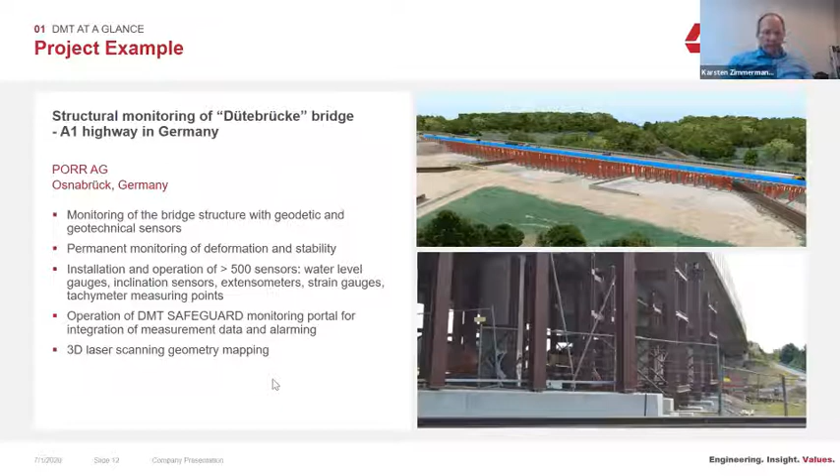We have installed over 500 sensors: water level gauges, inclination sensors, extension measurement devices, strain gauges, and so-called total station measurement points. These are installed by us. Each sensor is connected to the internet and sends data to our central database, which is included in our monitoring platform, DMT Safeguard, which handles basically all the client data.

This is illustrated here. You see on the right side different sensors which are connectable to our database. They send data to the database, and then the client sees a web front end with the latest monitoring data, and also has, for example, a map view to visualize the monitoring network, and gets, in case of an exceeded threshold value, an information alarm, a warning message directly on the construction site.

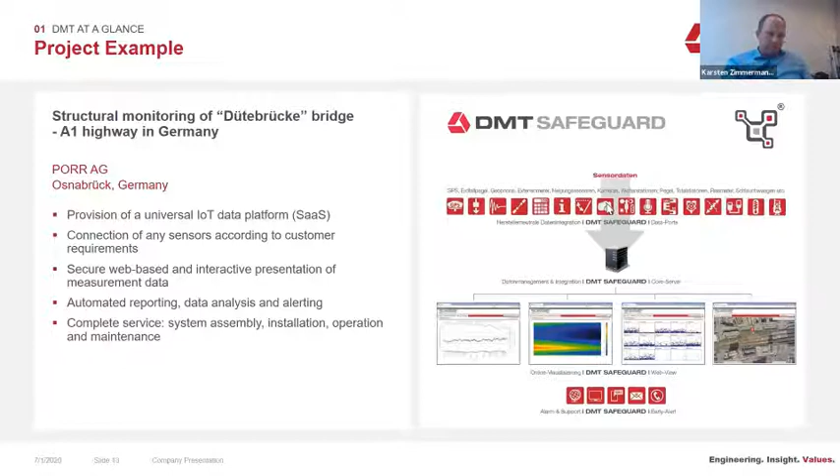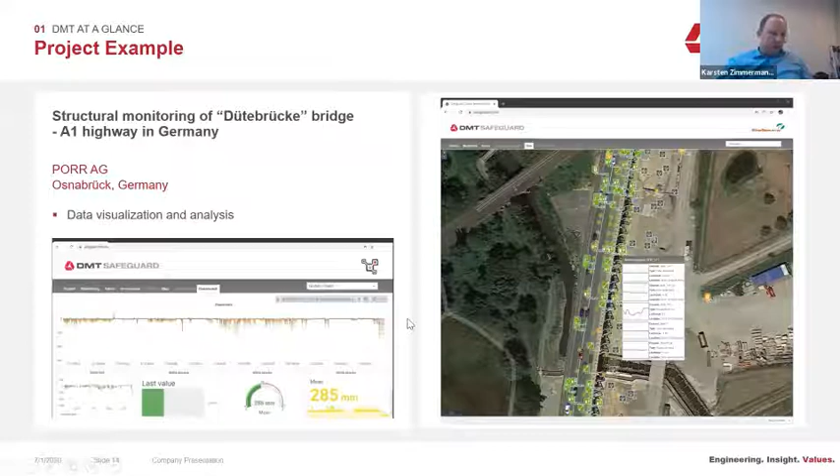Here it's shown: the client sees, for example, the bridge on the right, and sees all the small icons for the sensors, which are green in this case. This means everything is okay, no threshold value is exceeded. You can interactively zoom into this map to your object and check the sensor status online. There's a variety of visualization options, so you can plot charts, bar charts, and so on, just to get a real inside impression of your monitoring data.

So this brings us to the topic of tailings monitoring. Some introduction slides at the beginning: if we look on an international scale, we have over 18,000 tailing facilities worldwide, according to databases.

And there are different types of tailing facilities, as you know, like embankments, piled up paste deposits, for example dry deposits, or dams, which are basically integrated into the natural topography of the Earth's surface. These are really large structures, dams, several kilometers in length.

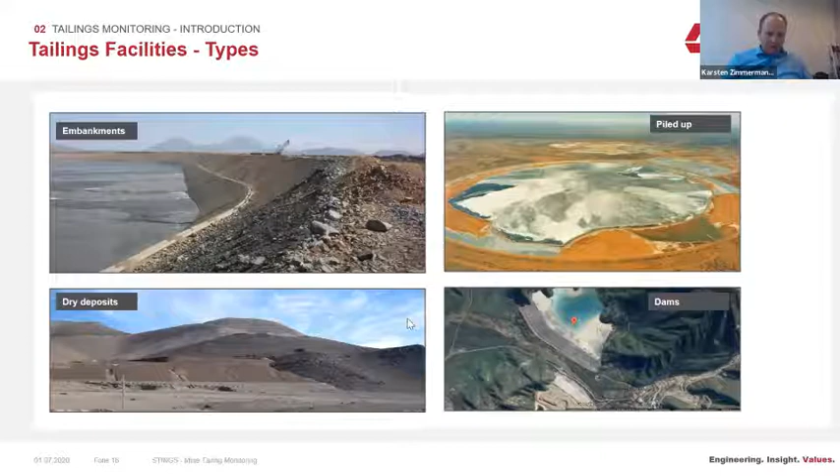In this case, in Chile, on the bottom right, it's a dam at 2 kilometers length and a height of about 100 meters. The geometry of the dam constantly changes because the structure is increasing due to increasing tailing.

Some details here about a specific country, Chile. Chile is important for us since we have a pilot test site for our STINGS services here. There we can count a high amount of tailings in general, over 700, and a lot of them, the largest part, are inactive or abandoned, and about 112 are currently active.

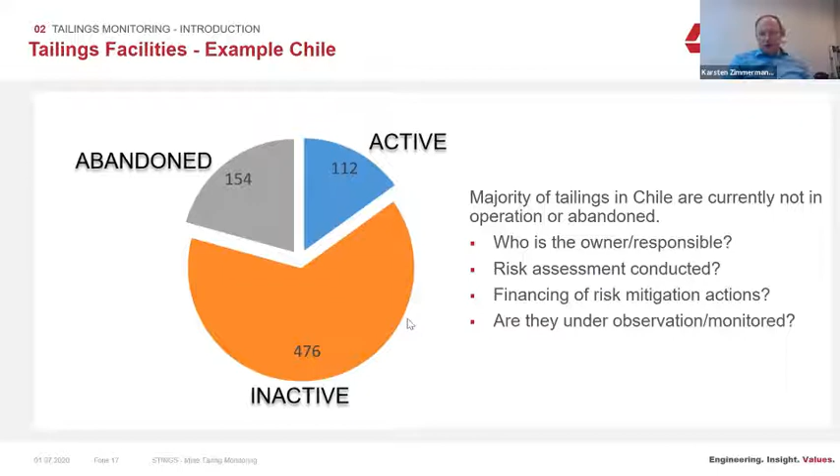Especially for the tailings not in operation or abandoned, there's always a question: who is the owner, who is responsible? Is risk assessment conducted? Who is taking care of financing risk mitigation actions? Are they under observation or monitoring at all? These are questions which arise.

Because, as you know, tailing operation involves risk, risk of failure. We had a lot of bad examples in the last years and decades. This is an example well known from Bento Rodrigues iron ore tailing in Brazil, where the whole tailing dam structure collapsed, inducing a massive impact on the environment and, unfortunately, fatalities as well.

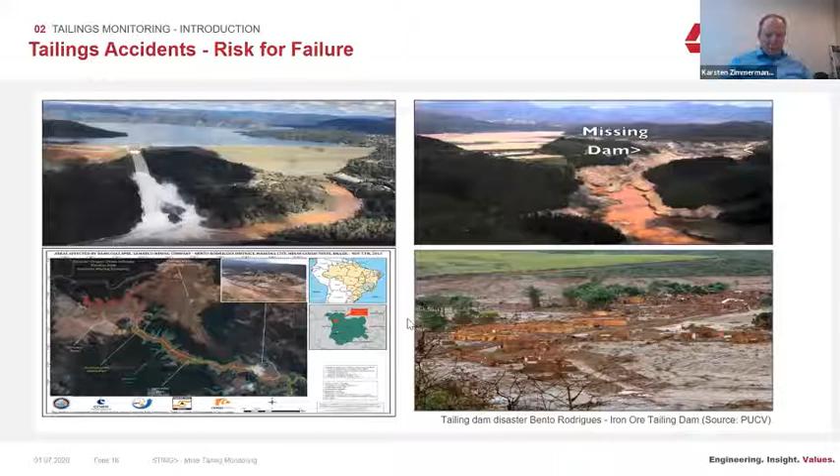If we look at statistics and some databases, we can see a significant amount of tailing failures over the last 100 years. You see here on the top right: North America, South America, Asia, EU, Africa. This statistic only shows reported cases. There is most probably a high number of unreported tailing failures which have to be taken into account.

Also, on the bottom right is shown the severity of tailing failures over the last decades. What can be seen is that the severity and impact increases over time, because the tailings increase in size and get nearer to populated areas and so on.

You can actually find calculations of the average cost of a tailing failure in the literature, which is about 455 million euros on average.

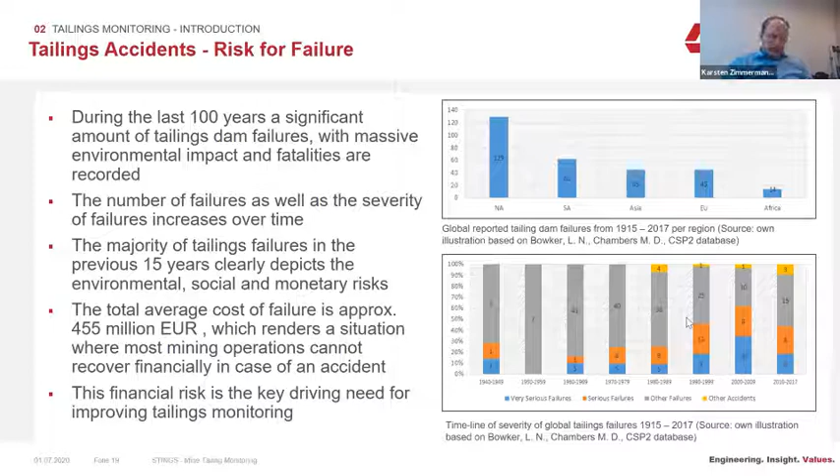On average, you can calculate an annual cost of about 275,000 euros per year, which a mining company would either have to save for the case of failure, or invest in mitigation measures to help improve and minimize accidents from the beginning.

And so here, the STINGS services, tailing monitoring, offers the technologies to do so.

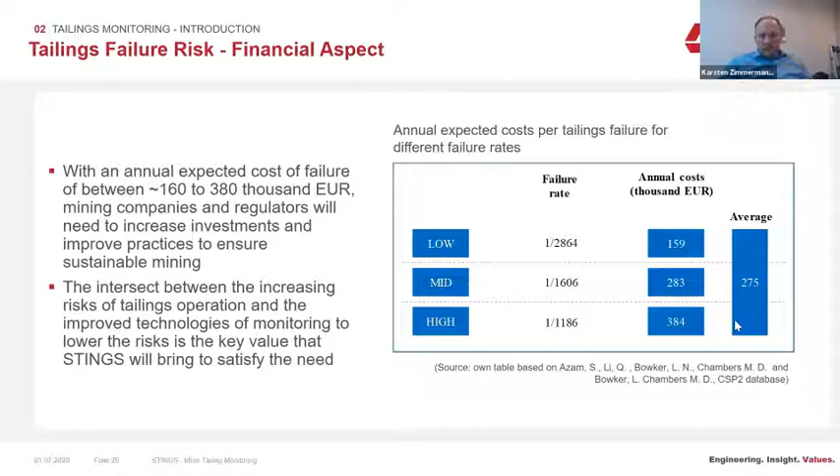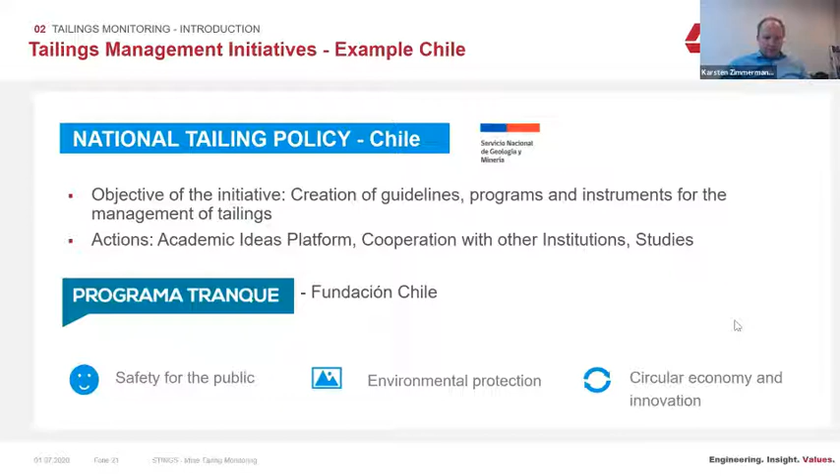The same can be seen in India - I was there a few months ago. In an initial step, they are also starting with a review of available tailings management guidelines, and compiling recommendations for improvement out of this - lessons learned, and then best practice guidelines to improve environmental safety and mitigate the risks.

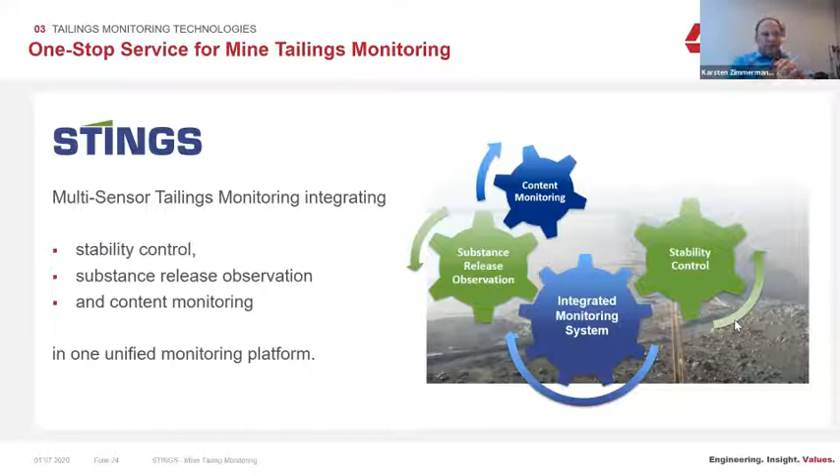And there's a partner network attached. DMT is the key partner, the project lead or service lead for the service, covering various topics like data integration and the data platform, which collects all the data, and also ground-based sensors, which I will explain in a minute. Then we have a company, EFTAS, which deals with remote sensing, radar remote sensing to detect ground deformation and leakages, for example.

We have universities attached, which deal with stability modeling, for example, and we have local pilot site partners. For example, the University of Valparaiso is responsible for the Chilean market, establishing pilot sites and test sites. We have a university in Romania dealing with a pilot site there, and the same for the Geological Survey of Slovenia, where we have a pilot site in Slovenia.

So the technologies we offer: geotechnical monitoring, which is basically providing a sensor network on site. We have radar remote sensing, which is processing and analysis of satellite data. We have optical remote sensing, which also uses satellite data, optical images. We have stability modeling, applying advanced modeling technologies to determine the stability of a tailing. We have geohydraulic modeling, where we have a special DMT-developed hydro toolbox allowing modeling of various aspects. And we have the data integration topic, collecting all available data in a unified platform.

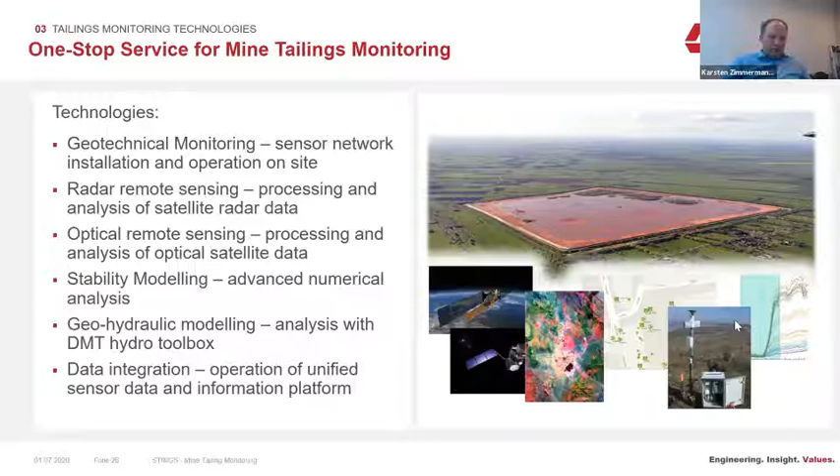So the platform solution is data acquisition at the tailing site, data transmission to a central database, in-depth information analysis, online visualization, and then early warning or alarming in case of exceeding a threshold or limit. And then we have also the reporting topic covered.

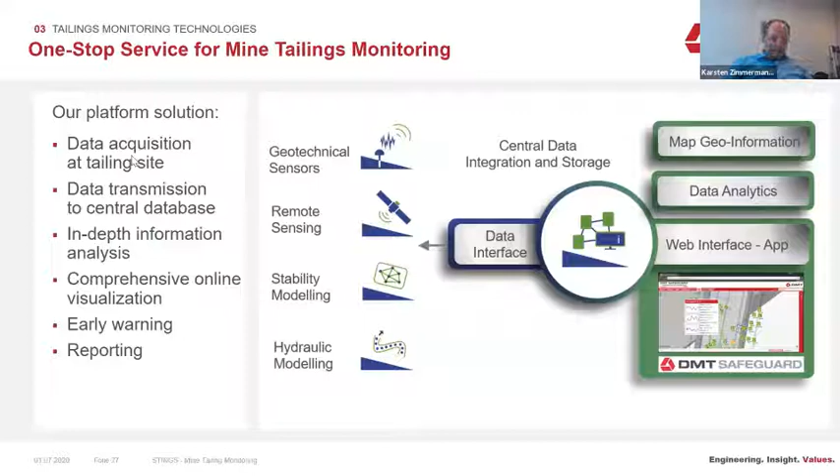So now I come to the specific technologies which are used or applicable in such a service. I would start with geodetical monitoring technologies, which are GNSS, GPS, total station monitoring systems, terrestrial laser scanning, as well as ground-based radar. So let's start with GNSS, GPS systems.

Within this project and service, we offer a special GPS measurement device, which is so-called low cost, so it can be applied in high numbers at the tailing site. This allows point-wise movement and deformation control. You have to install this device, the antenna, at a certain point of interest, and it will supply you with coordinate information every 24 hours, every 12 hours, or every 6 hours. It's quite dense from the temporal information density.

It's designed to be operated autarkic, with a power supply from a battery and a solar panel. It has an integrated data transmission modem, connecting to the cell phone network, to Wi-Fi, or to a local LoRa network, and then to the internet, finally transmitting the data to our servers. Processing is conducted automatically at our servers, and the results are presented on the web front end, which I will show at the end of this presentation.

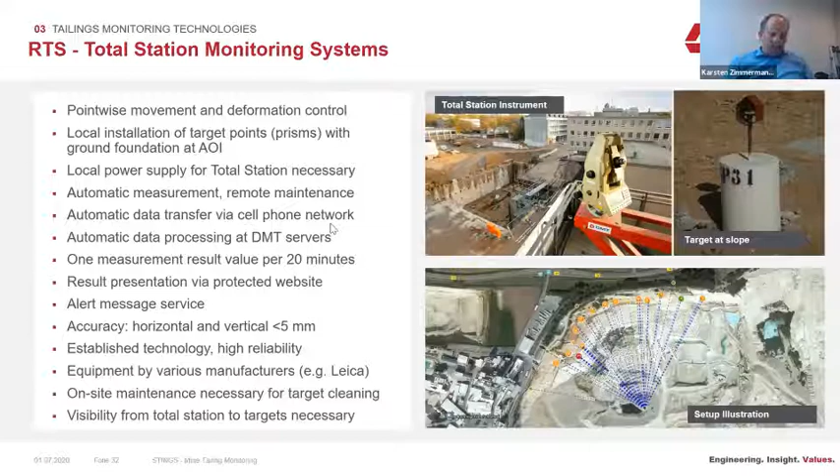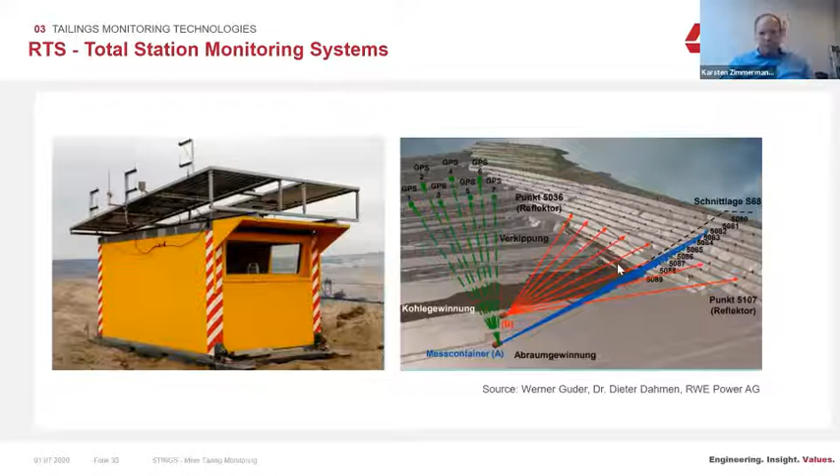And this can be, of course, combined. So total station measurement on the high wall can be combined with GPS, with the first instrument I showed you, and can be looked at or integrated to have a combined solution with improved accuracy and timely and temporal density.

Next technology is terrestrial laser scanning. Today we have a lot of new interesting equipment available. An example is the Riegl scanner, a long-range laser scanner, which is able to scan an object like a tailing slope from a very far distance, up to several kilometers.

There's currently a focus on campaign-wise measurements and semi-automatic measurements, to acquire a point cloud, a geometry of a target. Data is then transferred to an evaluation software, which allows basically calculating deformations between several measurement campaigns. Accuracy is quite high, below 1 centimeter.

What we're working on is to automate the system, so that you implement a laser scanner on site, and the laser scanner regularly scans the slope and automatically detects deformation. This is a kind of a research question still going on.

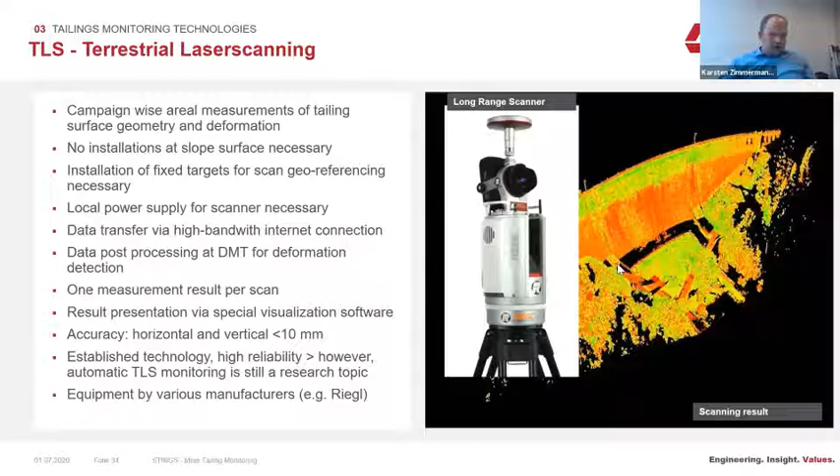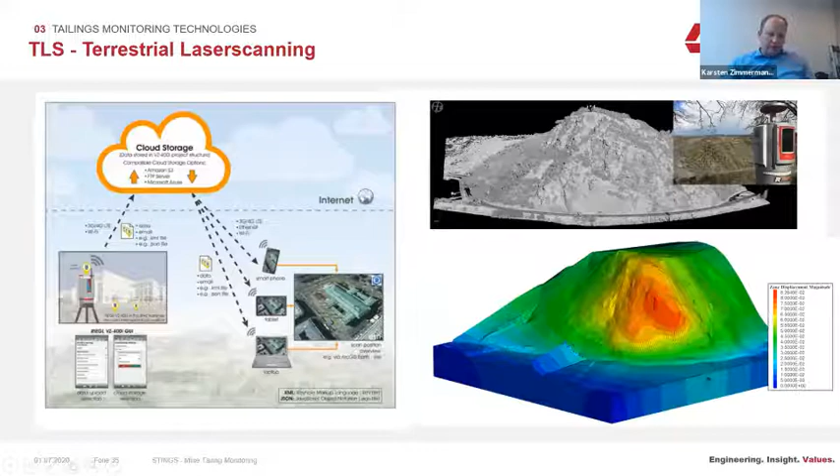As I said, the scanner is also connected to the internet here via cloud servers, and then the data can be automatically transferred to our database as well, and analysis can be conducted as shown, illustrated here on the right. Another technology is ground-based radar.

This is a very widely applied technology, especially in open pit mining with large high walls, to observe high wall stability.

There are also several instruments available which use a radar signal, analysis of a radar signal, a reflection from the high wall, to calculate displacements in line of sight.

Here the results have to be interpreted in the right way, because they are influenced by the weather conditions, and especially also by the changing slope surface conditions, like moisture on the slope and vegetation. But in general, it's a very applicable technology as well.

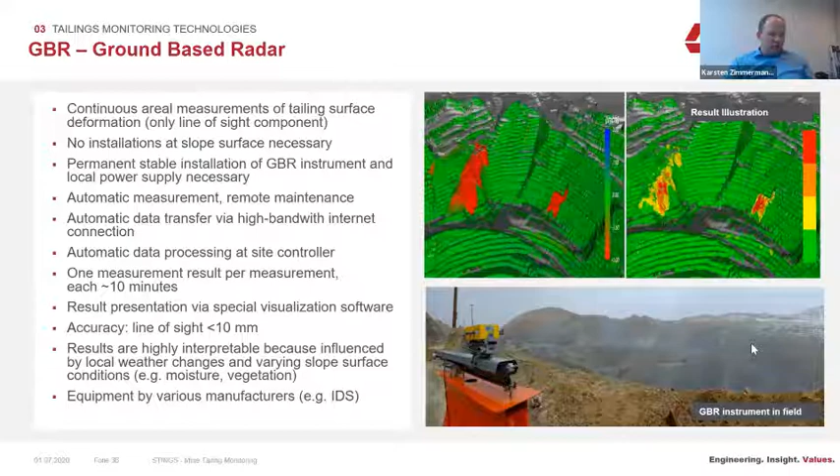And again, these instruments are connected to the internet, to the database, and information is provided basically in a common database. And then we have, as a collection here on this slide, shown a variety of sensors which are available.

These sensors are used especially not only to detect surface changes, surface deformation, but also to look into the structure, into the tailing dam, mainly by placing sensors inside of boreholes after the tailing is built, or the best way is to already install sensors during the construction phase inside the tailing.

So we have a lot of different types of sensors available: temperature, earth pressure cells, inclination measurement devices, water level sensors, microseismic sensors, for example, or seismic sensors, very important in earthquake-prone areas, for example in Chile, to observe microseismicity as well. And then we have video surveillance and so on.

The important thing is to automate these sensors as well as all the others, so provide them with a robust digitalization unit, and then a data transmission unit to bring them into the database online.

So now we switch a little bit from geotechnical sensors towards remote sensing. Here we can offer, first of all, radar remote sensing, where we can use satellite images, analyze these satellite images in order to get a ground subsidence or ground settlement map of a large area. So we have several satellite systems available today.

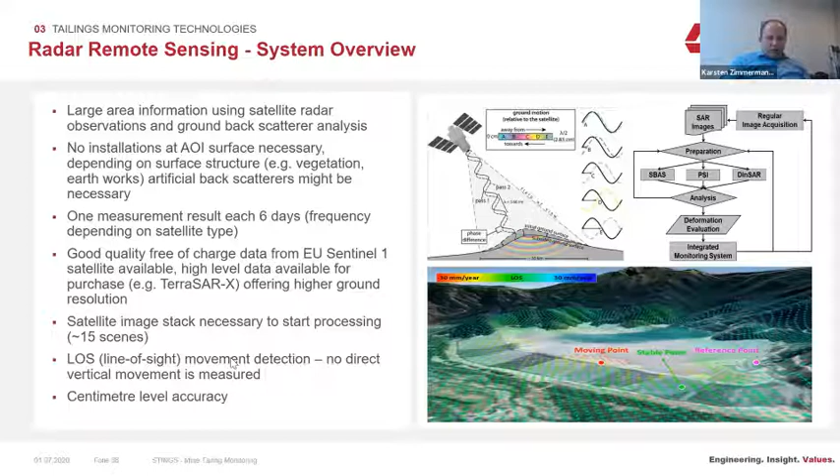We have another topic, optical remote sensing. Again, we use satellite images, this time optical images, and these images can be spectrally analyzed. This allows basically to analyze over a certain period of time a change, conduct a change detection, to detect for example soil moisture changes, vegetation changes, or changes in color.

And this can be an indication, for example, of a substance outflow of the tailing, and helps to determine critical risky areas at the tailing site.

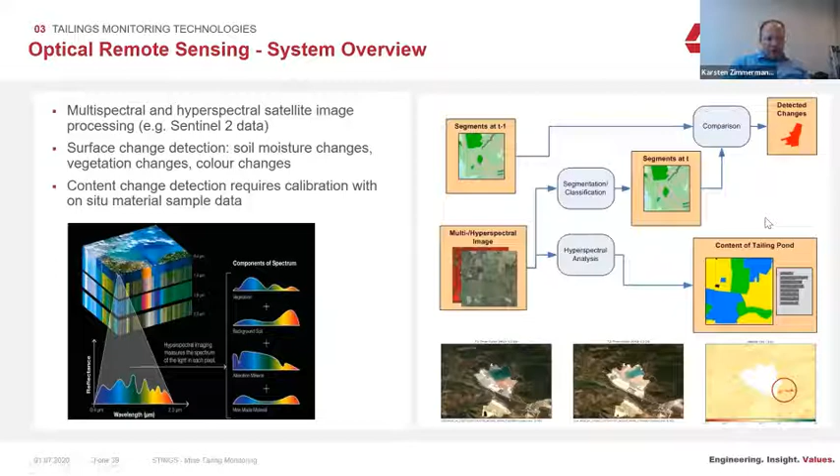Another topic, which is a little bit of a science thing at the moment, is content monitoring or content evaluation. So optical images can be calibrated using ground samples from the area regarding material and mineralogical components. They can be used to calibrate a satellite image or the processing algorithm, and they can help then to estimate the content inside the tailing or around the tailing regarding certain materials which are located at the site.

Then we have stability modeling. So we can apply here advanced numerical analysis using finite element modeling, for example, to model the stabilities under certain or different scenarios.

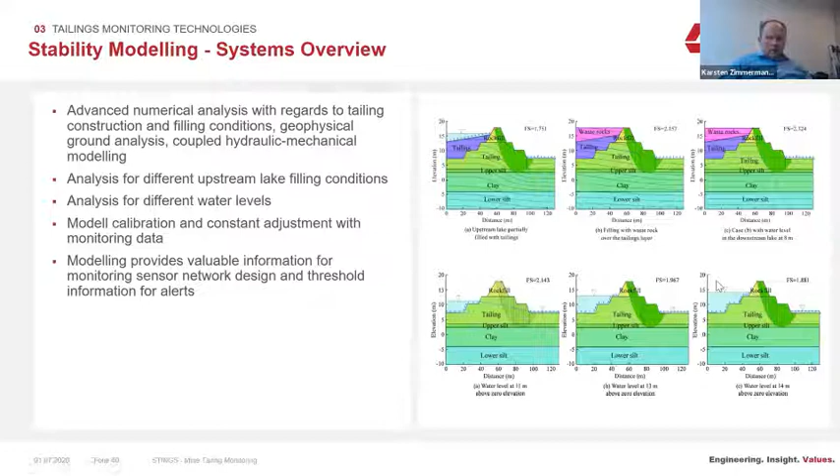We can use the geometry of a tailing, we can use the materials which are inside the tailing structure, and we can model, for example, different scenarios regarding filling, filling material, or the liquid level, the level height inside the tailing, and then calculate basically the risk areas or the areas with the highest pore pressure, for example, or the maximum shear strain increment at the tailing site.

And we have done this here in Chile. As you see, we take the geometry, we have construction information from the archive during the construction phase. We can build up a model with different materials, material layers and properties. Then we can...

calculate here in 2D and also in 3D the areas, for example, with the highest pressure. And this is information which is very valuable, because you can then see where is the most risk-prone area, where do we need to install some monitoring equipment for really adequate measurement of the actual deformation or actually pore pressure, for example.

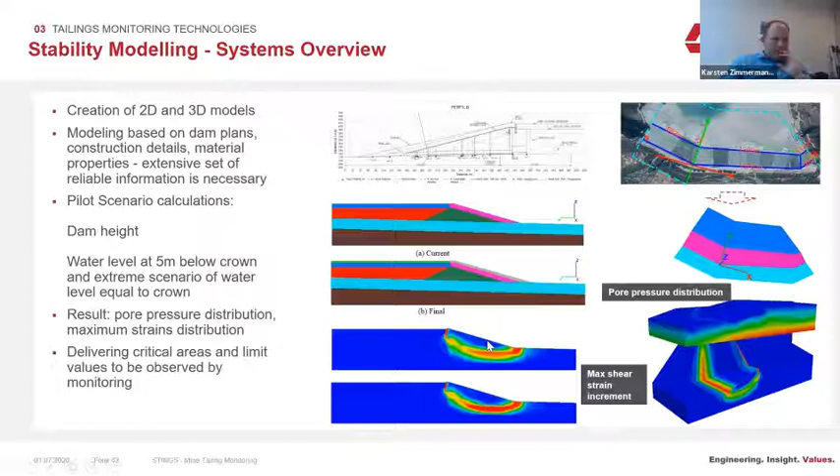The same is valid for geohydraulic modeling. So similar to the finite element model, you can build such a model here with a hydraulic model. You can implement different material types of the tailing structure itself, and also of the tailing content. And then you can basically model the hydraulic potential, where's the highest potential of an outflow of a tailing.

You can also model over time the chemical composition, or better say the change of the chemical composition inside the tailing. And this all helps to estimate the risk.

Related services are, for example, flood area modeling, so to model in the worst case the area which is influenced by a tailing failure. And also we can help to consult regarding, for example, the cleaning of discharge of a tailing, so of an outflow.

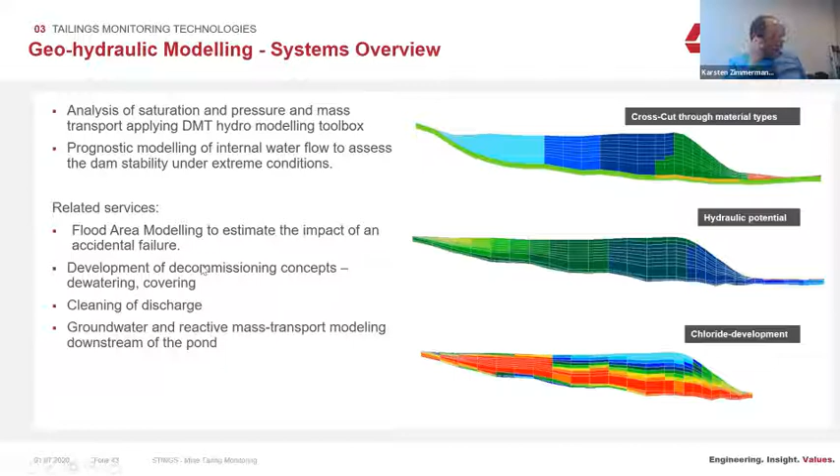Let's come to the front end, which a mining company or authority gets access to with a password-protected user account. It's on a website and can be accessed from anywhere basically in the world.

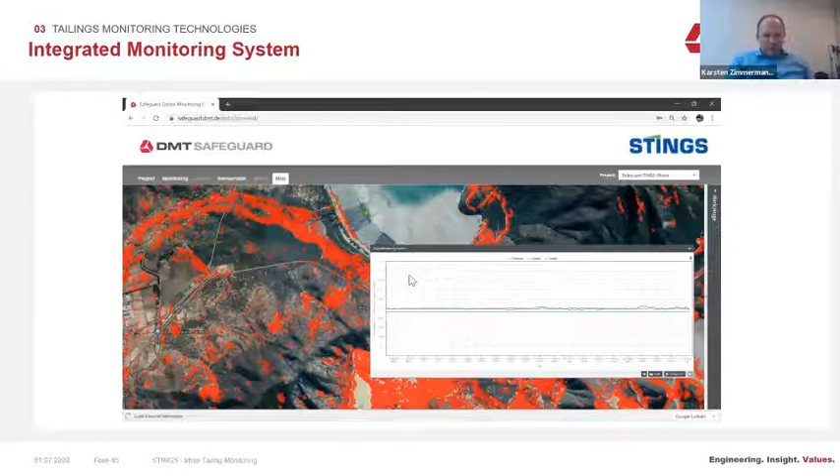You see here again the example from Chile, the tailing, and what is shown in red is the information from radar interferometry, from radar remote sensing regarding the large area ground information. You will see here point measurement sensors at the tailing site in green. You can access the data online and look back in the archive to show the data of the last week, month, or year, for example. You can see the latest measurement values, including the threshold values, and if a threshold value is exceeded, the mining companies or anybody involved gets an immediate alarm and alert message. There's interactive functionality integrated.

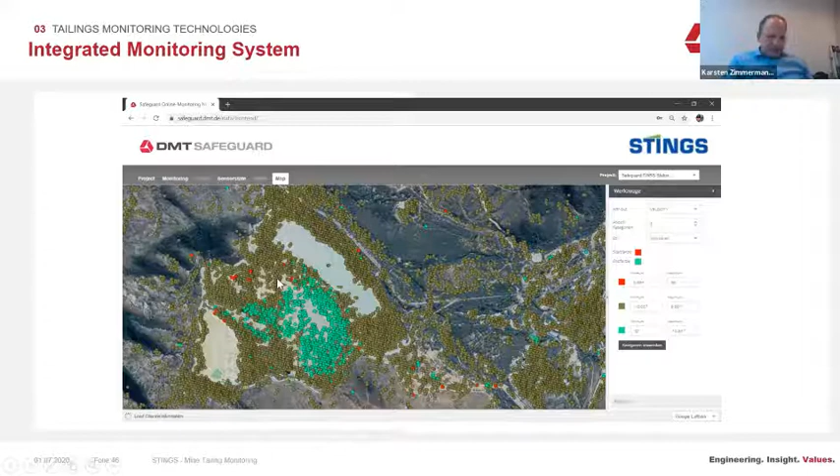If we look here again at the radar results, you can see the abandoned tailing in Chile. You see the available radar points which show settlement or uplift, and they can be color classified as to your needs. What can be seen here: we have in the center, small in green, a portion which settles over time. You can also create a cross section here, and you see a settlement inside the tailing. So this is an example of the functionality.

What also turned out to be important is direct information from the technician or from the people working at the tailing site. So what we have developed and can offer is a smartphone app which acts as another sensor, let's call it this way, which acts as a reporting tool. A technician can take a picture of a risk area, of a critical situation, comment on it, and send it directly from the smartphone into the monitoring system. It then shows up as a geolocated warning point, which the management can look at for further risk evaluation.

Okay, that's the end of my presentation: tailings mine monitoring. I'm open for the discussion now.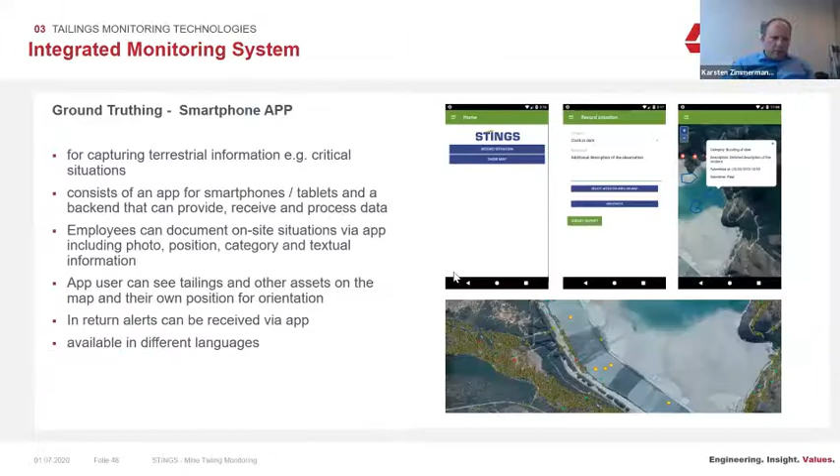I can go back. We were, I was for 2 weeks in India last year, and this is an example. You mentioned red mud, correct. I don't know if this answers your question, but this is related perhaps. Red mud tailings in India and also worldwide are a source of risk, of course, in India, because the main reason is that we changed the composition of the tailing material, going from wet slurry to dry slurry or sludge, because of newly available filtration technologies.

So the material changes, and this is a reason for increased risk, for increased failure observed lately also in India. So this has to be taken care of by applying stability modeling, not only once in the tailing construction phase or planning phase, but also during tailing operation. Just to adjust the parameters to new circumstances, for example going from wet material to dry material. I hope this answers your question.

Okay, thanks. So there's a question along these lines as well. The presentation showed how the monitoring is conducted, but very little information was given on how this is used to prevent failure. Has DMT got any case studies where they can show that?

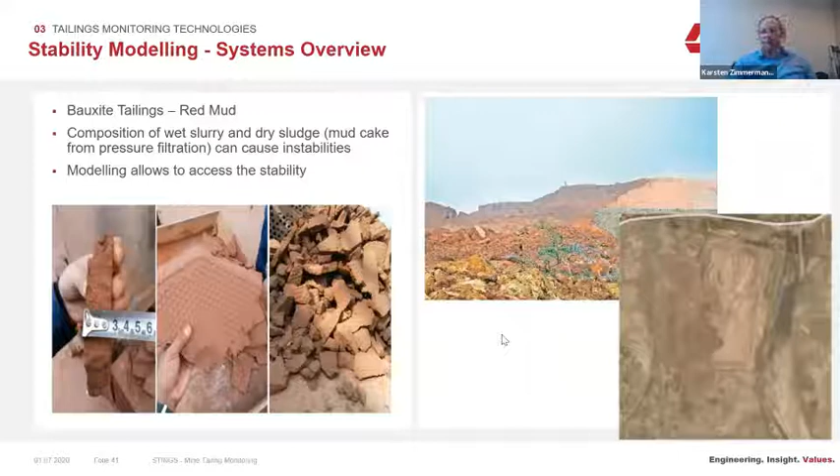The example is the Tranque project in Chile, a government-funded and initiated project to improve tailing management monitoring. It has a clear target to set a framework and requirements for authorities and the mining industry on how to monitor tailings - what are the requirements and obligations for a monitoring network. Stings plays a supportive role here, offering suitable monitoring technologies in accordance with legal requirements.

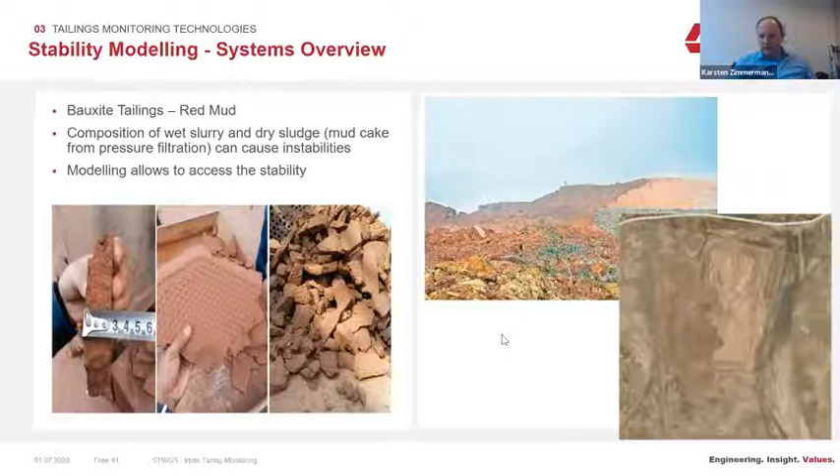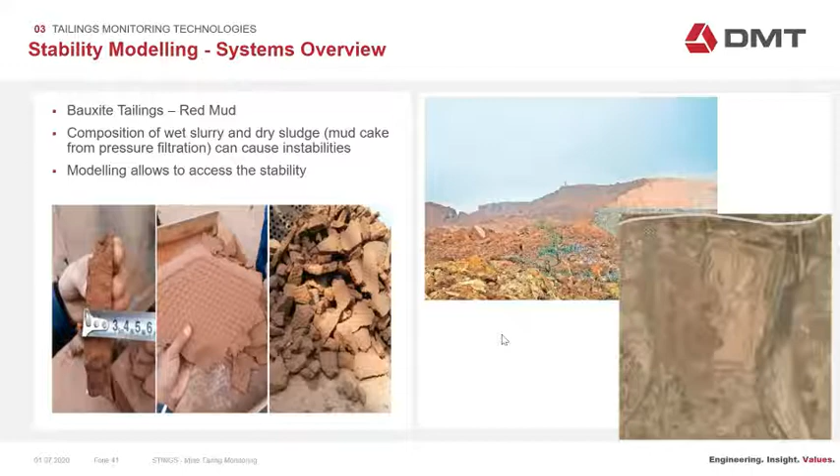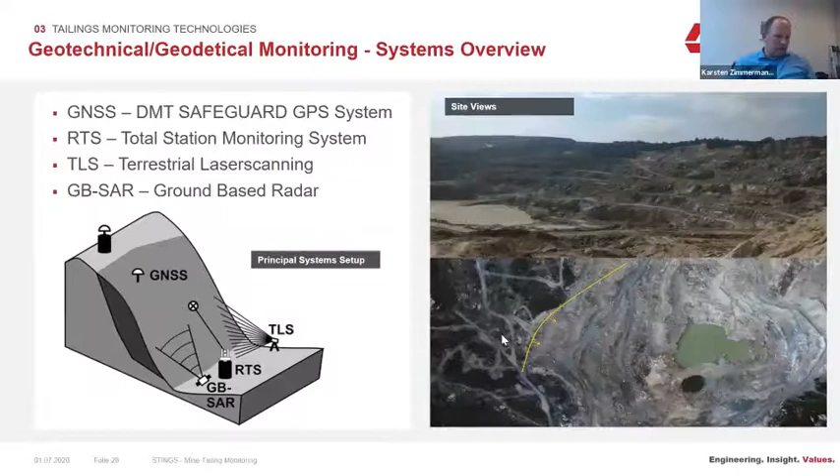A question from Mark Button: what type of unit is that, is it an inclinometer? This came up when discussing the technologies on offer, just before slide 33. I talked about GPS, which is this device used to determine position very accurately, with millimeter accuracy, to detect changes in position of a certain point where the antenna is installed.

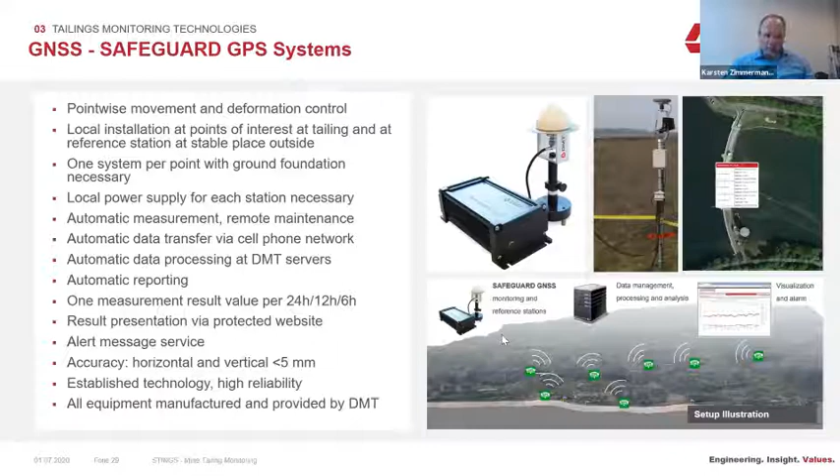I also mentioned inclination measurement devices. These can be connected, for example, on objects at the tailing, or some steel probes on top of the tailing, but are most suitable to be integrated inside the tailing dam or tailing structure, either permanently or in boreholes, measured campaign-wise to get information about changes over time in the tailing structure.

Next question: is there the opportunity to turn on pumps when the piezometric surface reaches a critical level, thus reducing pore pressures? The monitoring system has to observe the filling level inside a tailing pond, for liquid tailing ponds, and there are limit values derived from stability modeling that the filling height of the tailing has to stay within. The monitoring system database can be directly connected to a pumping system, which pumps out liquid in case of an increased level.

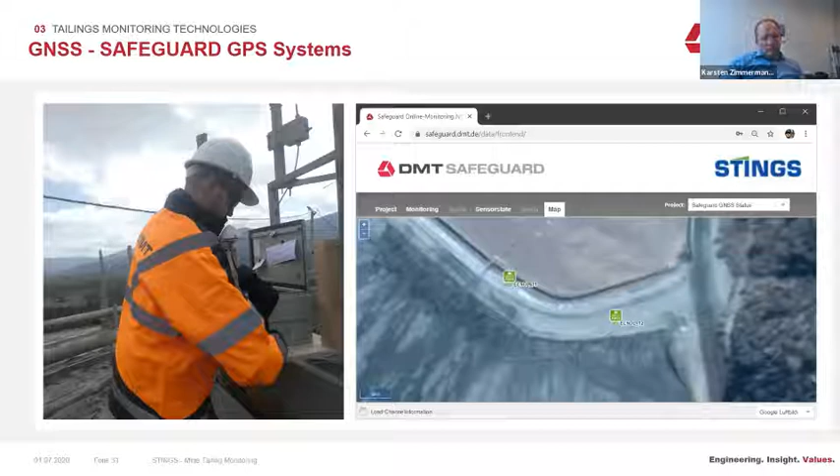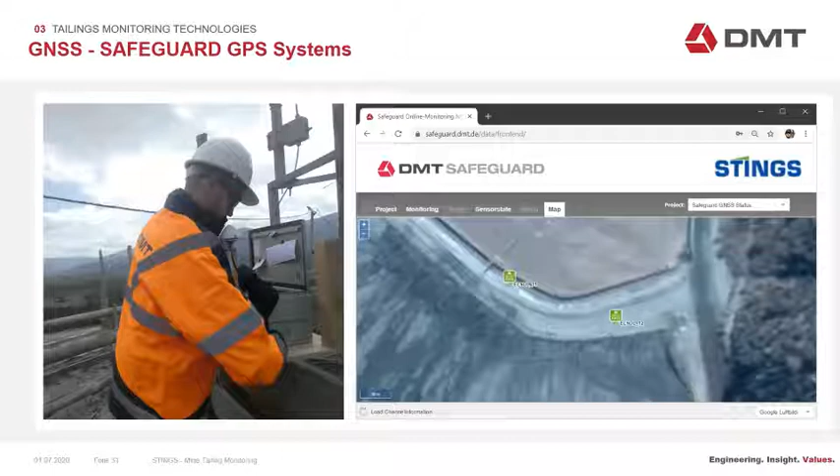Next question: one critical proactive measure in tailings operations is to monitor the dry beach length, which affects pore pressure in the dam. Which sensors are used to monitor this, and where is the monitoring done? I don't fully understand the question, but I hope I understand it correctly - we have piezometer pressure sensors and water level sensors, which in combination deliver the results you want, as I understand it.